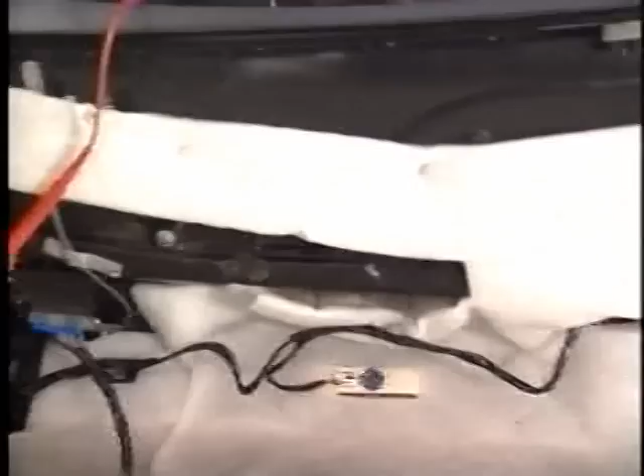Moving along to shorts, keep in mind that there are 2 types of shorts: short to ground and short to power. A short to ground occurs when a live circuit grounds out before its intended point. This usually results in blown fuses. A short to power occurs when the insulation chafes away on 2 live wires positioned next to one another, and the conductors contact each other. This crossfeed can cause a component to operate when a completely unrelated switch is used, or will prevent a component from being turned off.

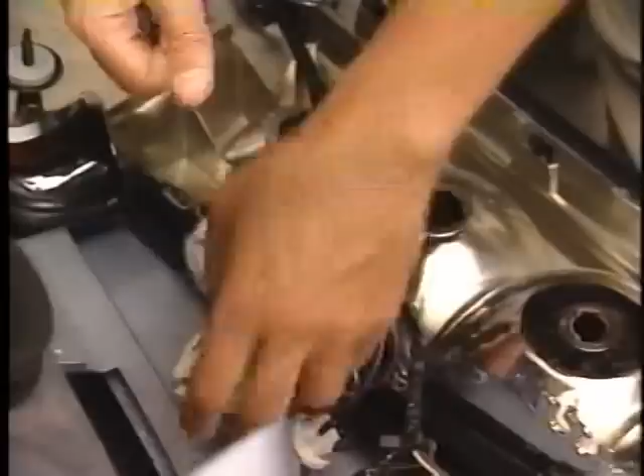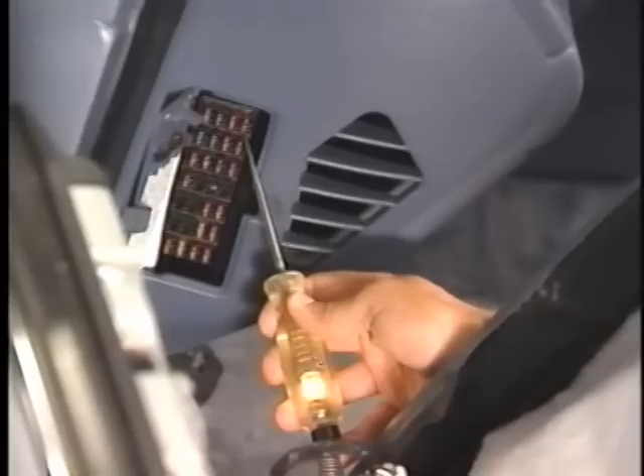The DC setting on the fluke meter can help you locate the short to ground. Begin by disconnecting all the loads in the problem circuit. Use the wiring diagram in the shop manual if you're not sure where they are. After turning the circuit on and making sure battery voltage exists at the fuse cavity, remove the blown fuse and connect the meter test leads to the fuse terminals. Wiggle the suspect area of the harness while watching the meter. When the meter reading changes, the portion of the circuit that was being wiggled is the one that's shorted.

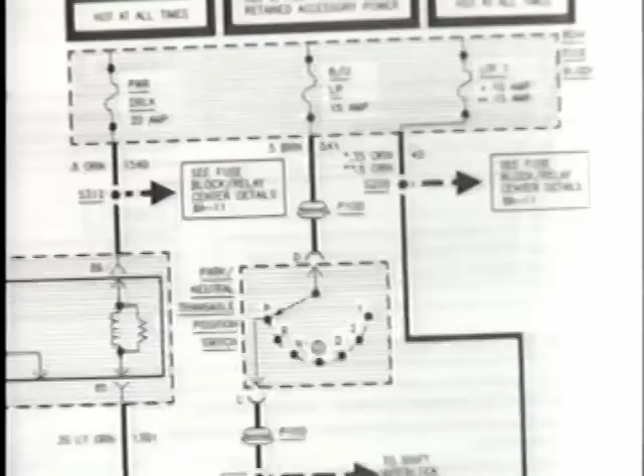Multiple branch circuits, like the tail lamps, interior lights, or power door locks, can be difficult to diagnose because any branch on the circuit can short to ground and cause the circuit fuse to blow. To locate a problem in this type of circuit, review the wiring schematic in the service manual. Using the Riviera's power door lock circuit with a blown fuse as an example, find the first splice after the fuse. In this case, it's splice 312. For more information, see the Fuse Block Relay Center details in Section 8A.

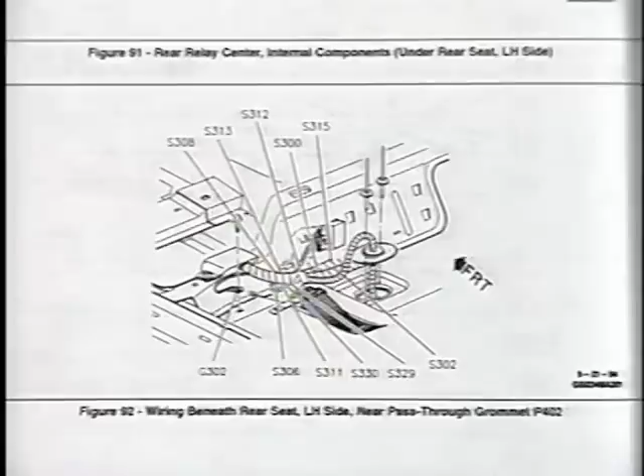The left-hand door isolation relay, door lock relay, left-hand seatbelt release, and right-hand seatbelt release are tied in to splice 312. To physically locate the splice, refer back to the power door lock schematic in Section 8A-131. Then, flip to the appropriate page. Splice 312 is located beneath the rear seat on the left-hand side. To isolate the problem, cut the circuit splice closest to the fuse panel. Then wire a spade-type fused jumper harness into each branch of the circuit following the splicing procedures outlined in Section 8A of the service manual.

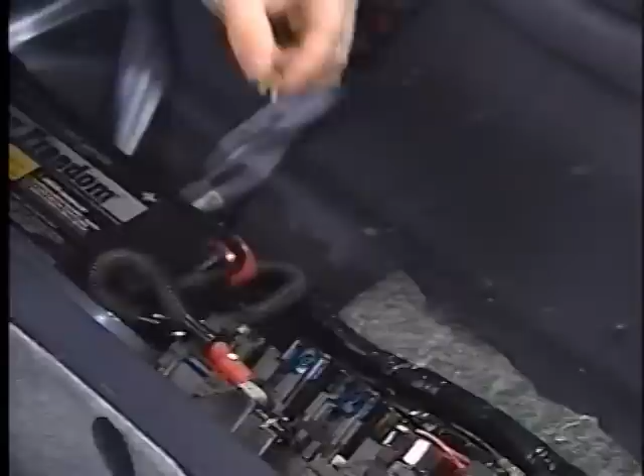The jumper wires should be at least the same size as the wire being spliced to prevent them from becoming fuses. When the jumpers are wired into the circuit, install fuses one size smaller than the fuse that protects the circuit, and install an original size fuse in good condition into the fuse panel. Then operate the circuit. The circuit branch that blows the inline fuse is the one that's shorting to ground. If none of the inline fuses blow, the circuit between the fuse panel and the splice is grounded.

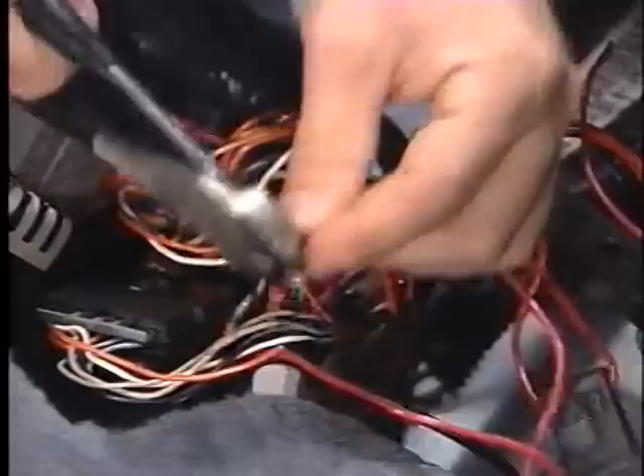In some cases, it may be necessary to reassemble the vehicle and drive it with the inline fuses in place to duplicate the problem. This procedure is effective in locating shorts to ground that occur on an intermittent basis. After locating and repairing the short, remove the jumper harnesses from each of the branches and splice them back into the circuit as they were originally installed following approved procedures.

An unpowered test light can be used to find a short to power. Begin by turning on the power for the problem circuit. The next step is to probe the circuit, starting at the ground side while working toward the load side. In this particular case, the brake lights are on when the parking lamps are on without anyone touching the brake pedal. This means the parking lamp circuit is also feeding the brake lamp circuit.

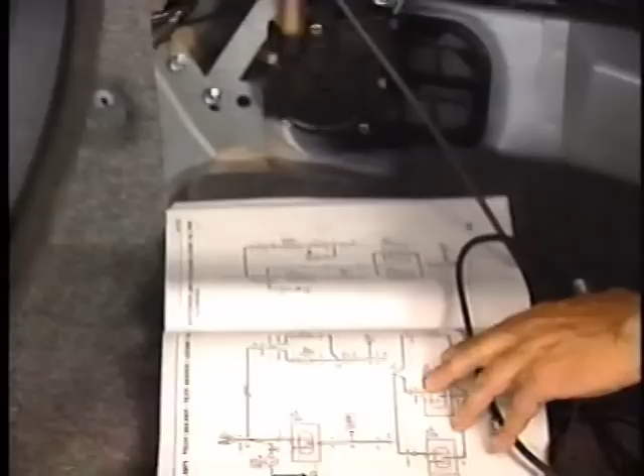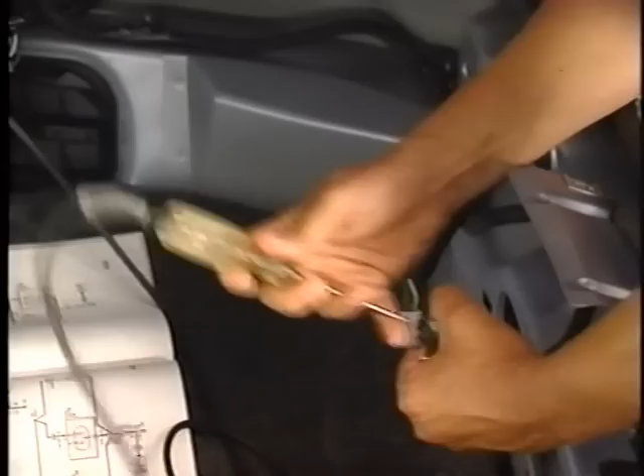After connecting the test light to a known good ground and checking the wiring schematic, you find power at both the parking lamp and brake lamp feed wire on the load side of the connector. To locate the problem area of the harness, separate the connectors and check for voltage again. Since only the parking lamp feed wire lights the test light, that section of the harness is working as it should. The problem lies in the other section of the harness. To isolate the problem, assemble the connector, then connect the test light to the brake feed wire and wiggle the harness.

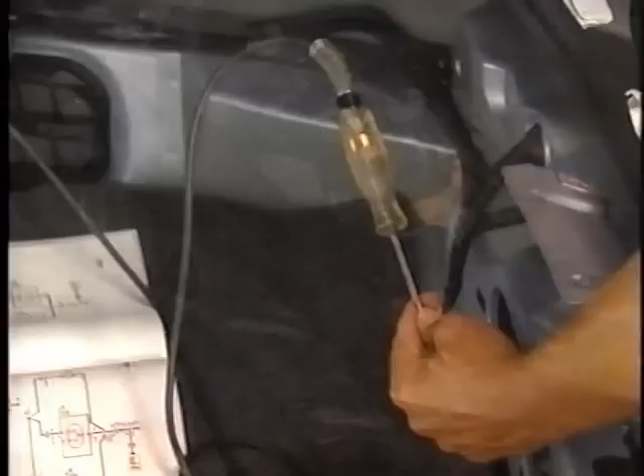When the light goes out, you found the short to power. Now, one way to check resistance in a circuit is to perform a voltage drop test. A voltage drop test indicates how much voltage is used by a particular connection, component, or section of a circuit. Voltage drop is directly related to resistance. The larger the voltage drop, the greater the resistance in a circuit.

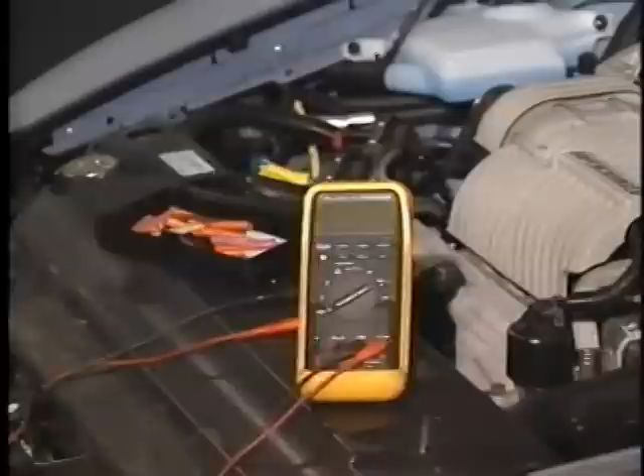To check for voltage drop in an ECM/PCM ground circuit, run the engine. If the engine won't start, make sure the battery is in good condition and the ignition is on. Set the Fluke meter to the DC volt scale. Then, connect the black test lead to the battery negative terminal and use the red test lead along with an adapter to back probe the ground side of the throttle position sensor.

With current running through the circuit, the voltage drop should be less than 100 millivolts. If it's more than this, check the ECM or PCM grounding point for looseness and corrosion. If the grounding point is okay, the ground wire may be partially or completely broken. Check for this by wiggling it. If the voltage reading drops, the wire is damaged and requires repair.

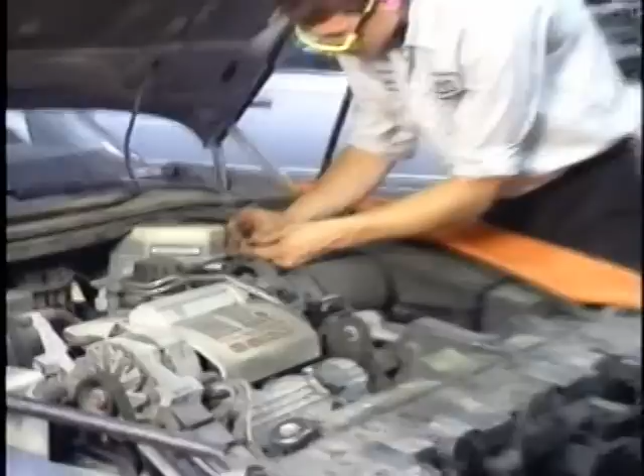Now, I know some of you may be skeptical about following the steps in the chart in order, and admittedly, in some cases, it may take longer to diagnose a problem following this chart. But the majority of the time, following the steps will save you time and reduce comebacks. The most important thing a service consultant can do is verify the concern. Begin by questioning the customer to see what the problem is, how often it occurs, and under what conditions. To help you get all the information you need for diagnosis, a diagnostic worksheet is included in both the service consultant's and technician's reference books.

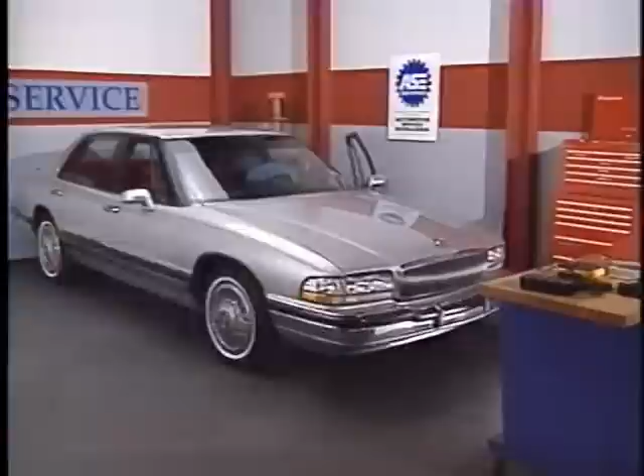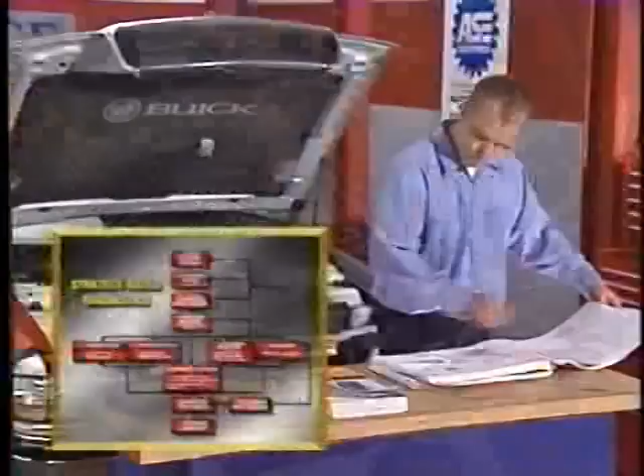Your time is valuable, so we'll explain strategy-based diagnosis using 3 real-world situations. In this first case, a customer's Park Avenue will not start, so begin by verifying the concern. Since the car won't start, perform the preliminary checks. Preliminary checks are a basic once-over to help you spot any obvious defects and identify what parts of the system are operating properly. In this case, make sure the battery cables aren't corroded and that they're securely connected to both the battery and starter solenoid. Also, take a look at the battery eye to ensure the battery is fully charged. Since these items are okay, move on to the diagnostic system checks.

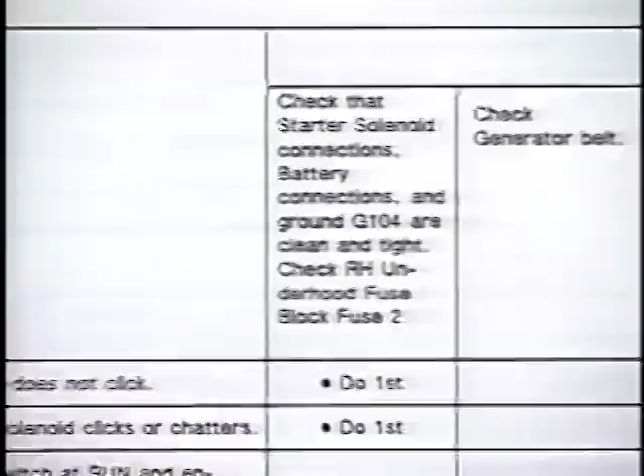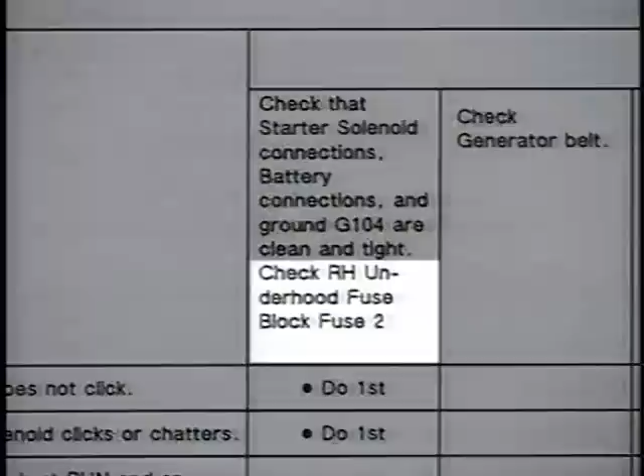After finding the problem, which in this case is engine does not crank and starter solenoid does not click, perform the steps in order. The first step is to check that the starter solenoid connections, battery connections, and ground G104 are clean and tight. Since you've already checked the starter and battery connections, check ground G104. It seems to be in good shape. Next, check fuse 2 in the right-hand underhood fuse block. And the fuse is blown. Only a short to ground would cause this type of problem. So check all the wiring in the circuit for signs of chafing or pinching.

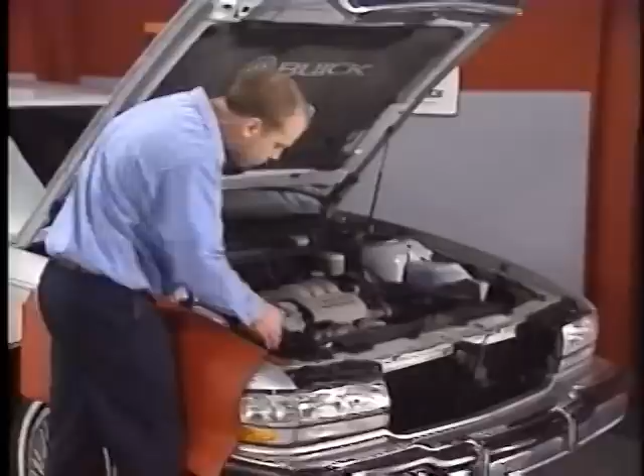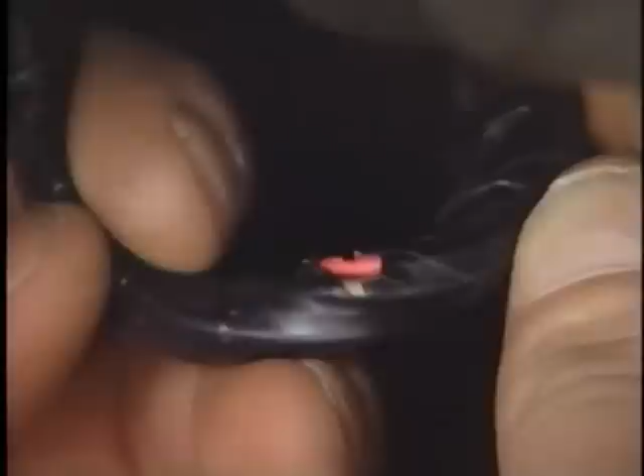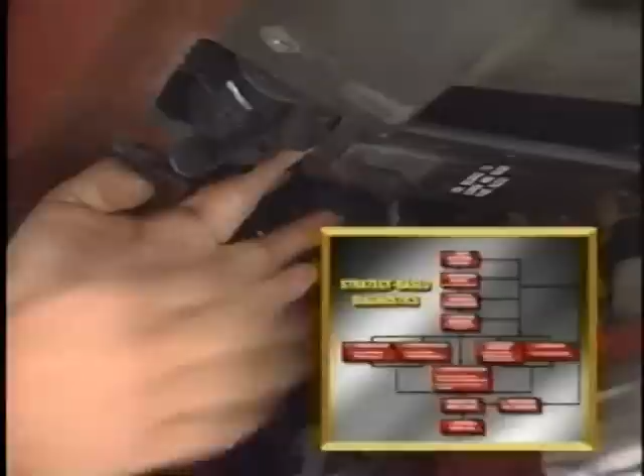If the wiring is resting against a sharp object, like the edge of a body panel, chances are the short will be there. If you're not familiar with the harness routing of the system in question, or just need to refresh your memory, review the wiring schematics in the service manual and check the routing of the harnesses in the circuit. In this case, the pink ignition wire for this circuit is pinched behind the parking brake. On closer inspection, the edge of the parking brake cut through the insulation. Since the wire was shorted to ground, you know it was responsible for blowing the maxi fuse. After repairing the wire, tie it away from the parking brake. Then install a new maxi fuse and verify the repair.

That illustrates how to use strategy-based diagnostics to repair a simple problem. You didn't have to go through all of the steps, but you did need to follow the steps in order. Now, let's see how strategy-based diagnostics can help diagnose something a little different.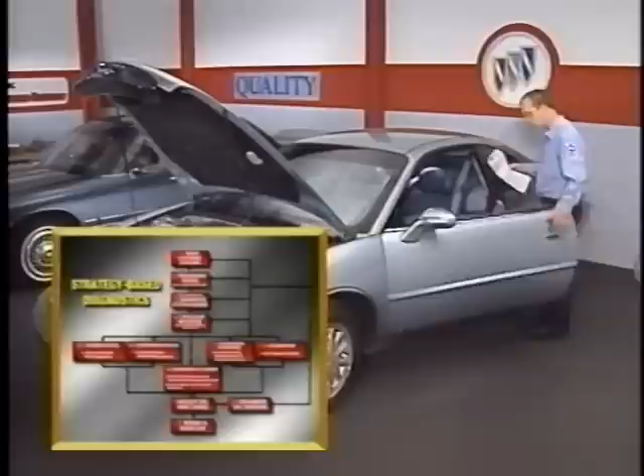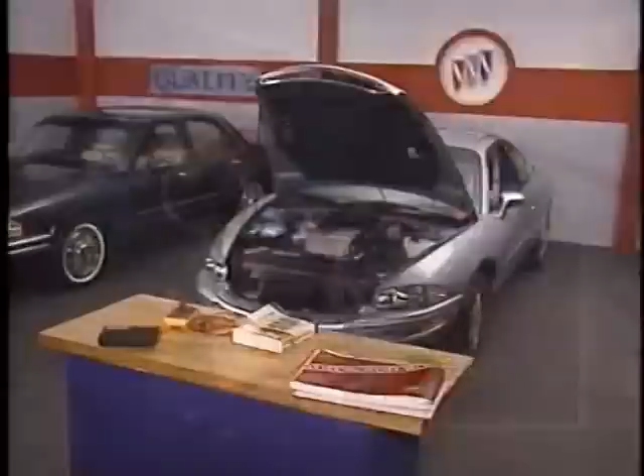The repair order for this Riviera states that the traction off indicator lamp is on steadily. As always, begin your diagnosis by verifying the concern. Sure enough, the lamp remains on after the bulb check. So perform the preliminary checks. This begins with a visual inspection, which in this case is outlined in the service manual.

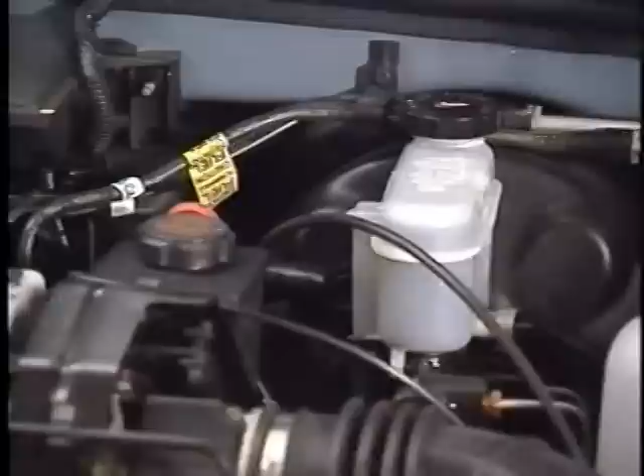The parking brake seems to be working okay. The major components seem to be in good shape. And all the fuses are in good condition. That leaves the connectors and grounds as the last items to check during the visual inspection.

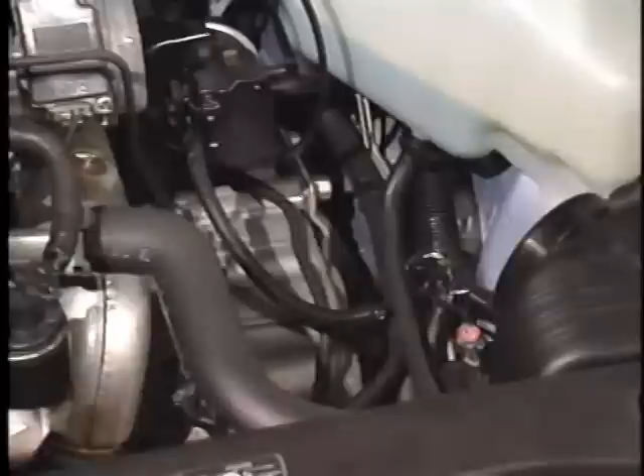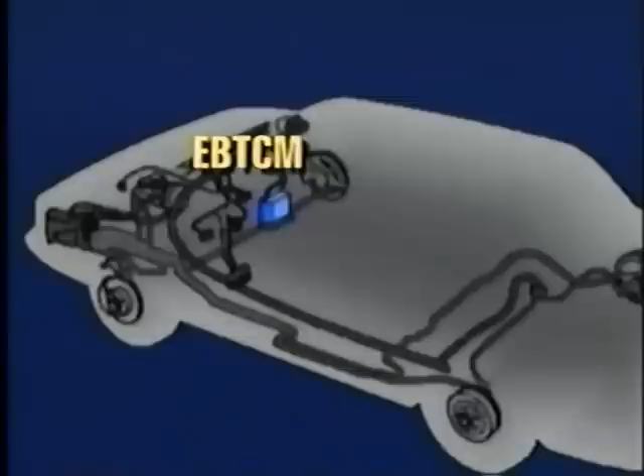Begin with the obvious anti-lock brake system grounds, which include G104, G201, G202, and G301. But don't forget the less obvious ground, G100. G100 is a PCM ground. However, with the Teves 4 traction control system, the electronic brake and traction control module communicates with the PCM on the data line to control engine torque when necessary.

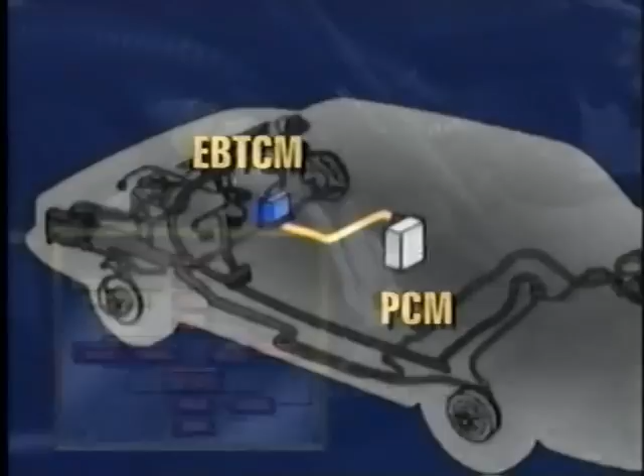In turn, a loose PCM ground could set codes 75 and 77, lighting the traction off indicator lamp. And ground circuit G100 is loose. After torquing the bolt to specifications, clear the codes and check for the problem once again. Since no codes are stored, you know you found the source of the problem.

Now, let's see how strategy-based diagnostics can help with something a little more complex. This LeSabre is in for service because the door locks work only when the doors are open. To add to the problem, the radio antenna and AC controls work on an intermittent basis. But instead of following strategy-based diagnostics, the technician decides to replace the door lock switch and solve the other two problems later.

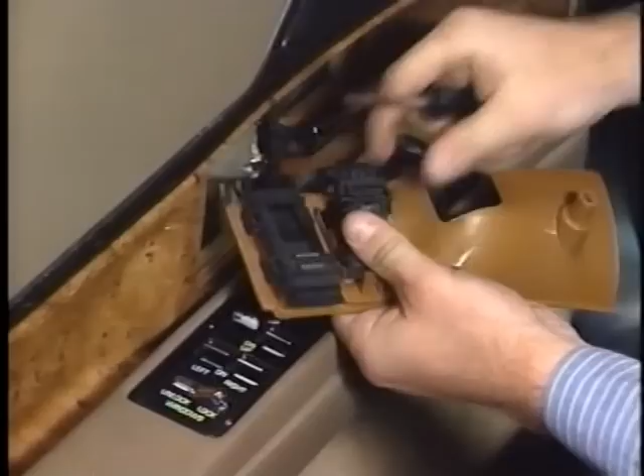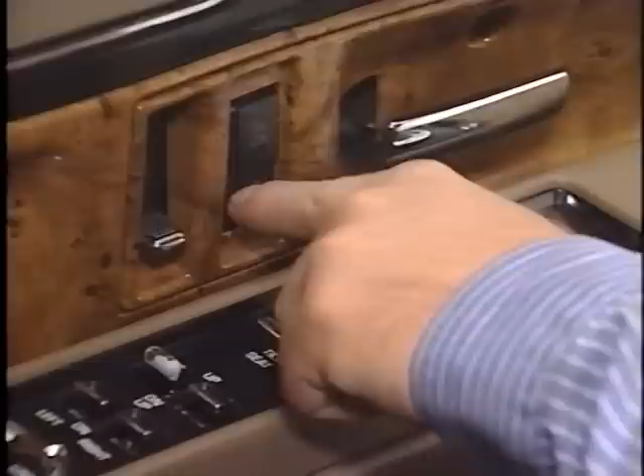So, he spends some time over at the parts window waiting for a switch. After 10 minutes have passed, he finds they don't have the switch in stock. Now he has to wait for the porter to go out and get a switch before he can complete the repair. With the right switch finally in his possession, he completes the switch replacement. But after all this, he finds it still only works when the door is open. So he's wasted a lot of time and hasn't fixed anything yet.

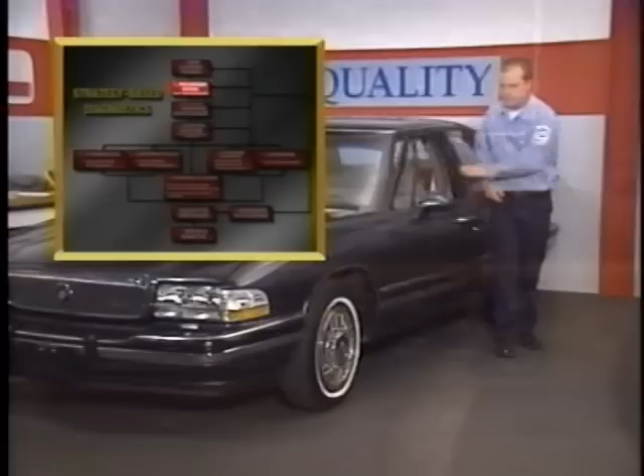At this point, he decides to get back on track by following strategy-based diagnostics. That begins with verifying the concern. All of these problems exist, so he moves on to the preliminary checks. Since he's already checked the operation of the systems in question, he needs to check them visually for any signs of problems. The wiring shouldn't be pinched at any point, and the insulation should be in good condition without any signs of cutting, chafing, or burning.

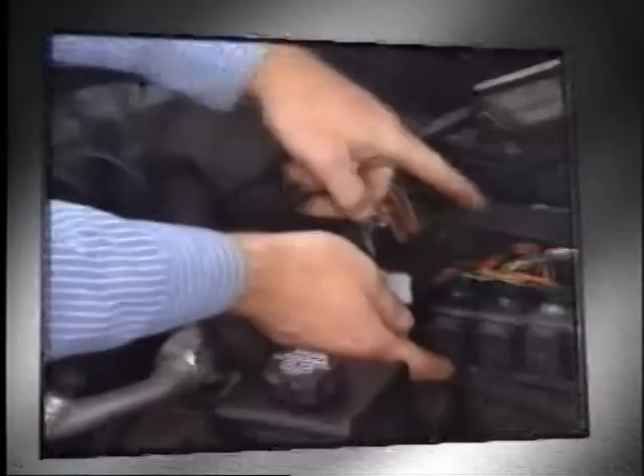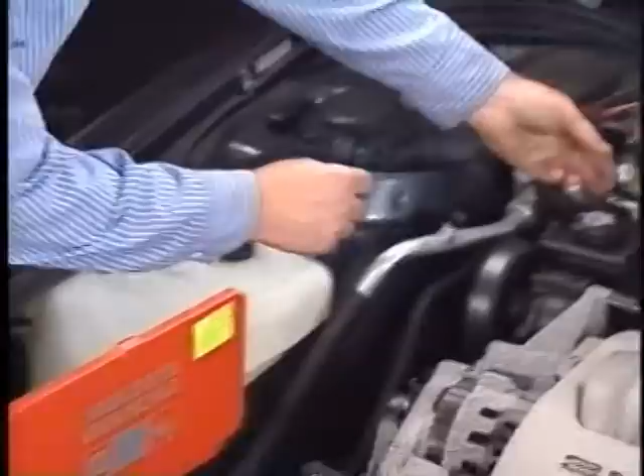As he works, he separates the electrical connectors in the circuits in question and takes a close look at their terminals. They're as they should be, fully engaged in the connectors and free of corrosion. He also checks the fit of mating terminals because he knows that they need to fit together snugly to do their job. To do this, he uses terminals of the opposite sex to prevent terminal distortion. Although larger terminals can sometimes be bent back into position, any poor-fitting micro-terminals should be replaced. In this case, the preliminary checks didn't reveal anything unusual.

So he moves on to diagnostic system checks. Since this problem ties into 3 different systems, he'll need to follow the diagnostic system check for all 3. Keep in mind that earlier manuals might refer to a system check or a functional check rather than a diagnostic system check, but they're all the same thing. Unfortunately, the diagnostic system check didn't reveal the source of the problem. So he checks for bulletins. Remember, this includes information available via TechLine equipment, as well as printed bulletins. But no information covers this particular problem.

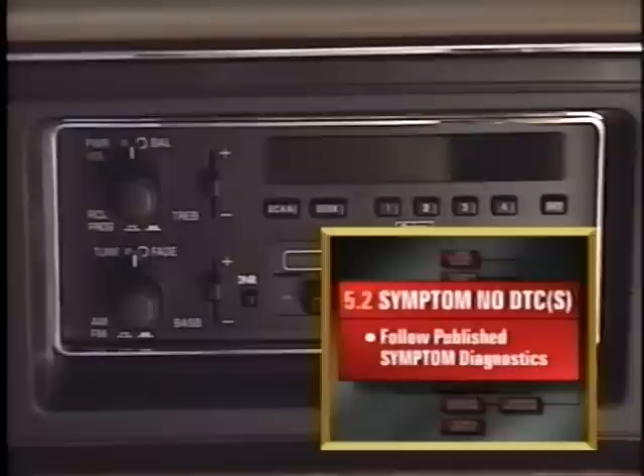Normally, he would proceed down to step 5.1 and check for any stored DTCs. However, the C67 air conditioning in this LeSabre doesn't store DTCs, and the power door locks and antenna never have. So he moves to step 5.2 in the chart, symptoms with no DTCs. However, with a problem like this one, he knows the chances are slim that a symptomatic chart will cover all 3 situations simultaneously. And that moves him to step 5.3, no published diagnostics.

Since there are no published diagnostics, he'll need to analyze the problem and develop his own diagnostics based on his knowledge of the circuit, as well as from other available sources of information, like the wiring schematics in the service manual and any related KnowHow programs. In order to have a problem in so many different areas, there must be a common thread that these circuits share, and this leads him to check the power and ground circuits. Since all the systems that are experiencing trouble don't share power circuits, the power circuits can't be the problem.

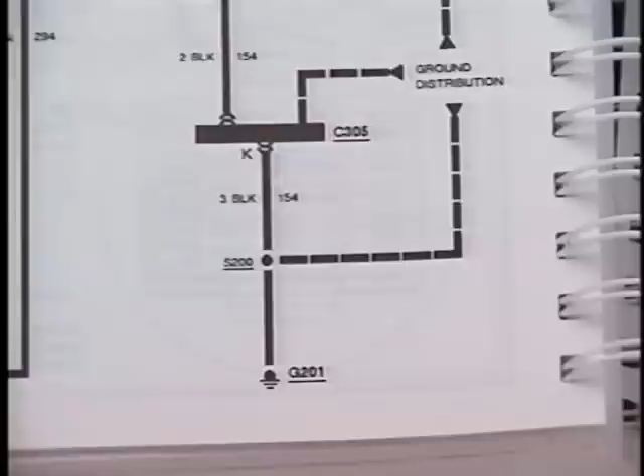However, the wiring diagrams indicate the power door locks, radio, and AC control head all share the same ground circuit. In this case, it's circuit G201. And circuit G201 is loose. This very well could have caused the problem the customer experienced. After torquing it to specifications, he verifies the repair. All the components seem to be working normally now.

In a situation like this, the technician didn't need to go through every step in numerical sequence. For example, he knew that a symptomatic chart wouldn't cover a situation as unusual as this, so he jumped from step 4 to 5.3. And that's the beauty of strategy-based diagnostics.

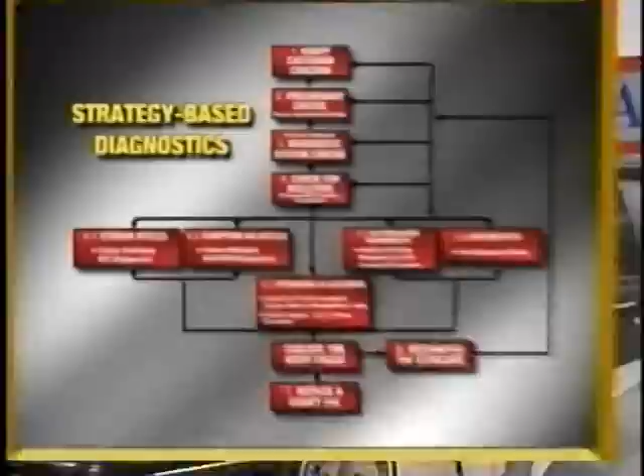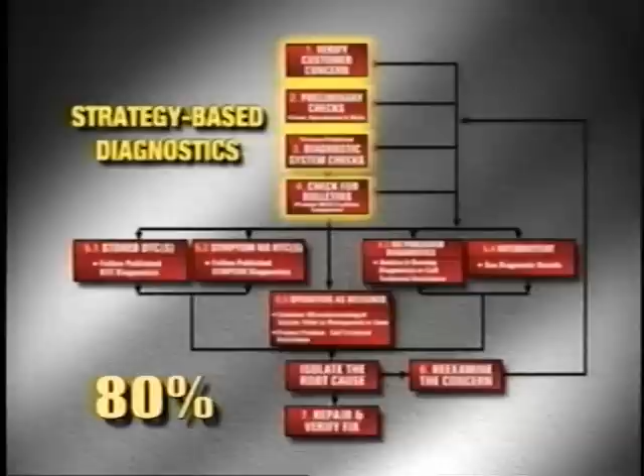As your experience grows, you may not have to perform every step in the chart in numerical sequence. It all depends on the problem at hand. And the chances that you'll need to go through all of the steps every time are pretty slim. About 40% of all problems are diagnosed by the time you reach the end of step 3. And your chances of finding the problem increase to about 80% when you've completed steps 4, 5.1, and 5.2.

Over the long haul, following strategy-based diagnostics will increase your diagnostic skills, which in turn can help put more money in your pocket.

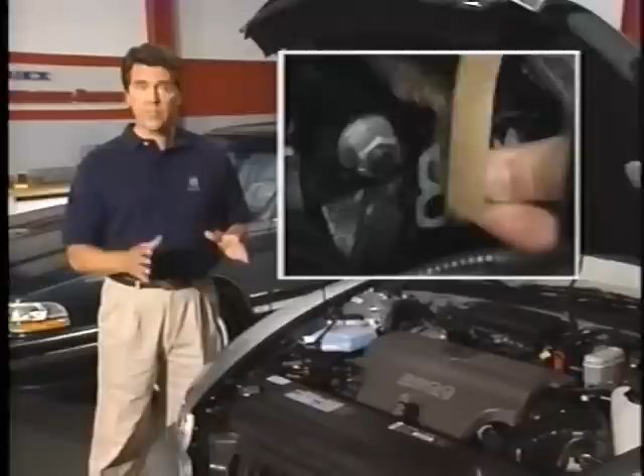As you can see from our previous examples, grounds are vital to the operation of the electrical system. And systems whose operation is based on milliamp signals, like the ECM, PCM, SIR, and ABS systems, are extra sensitive to their ground circuits and connections. What would seem to be a minor amount of resistance in a ground circuit, caused by things such as corrosion and paint, can have a detrimental effect on these circuits. In effect, it's like having a resistor in the circuit.

Consider this. The level of voltage and amperage flow in a particular circuit helps determine the factory calibration of electronic sensors. In turn, the resistance in a ground circuit has a direct bearing on the level of voltage that's available for that circuit. If the resistance in the ground circuit rises above a predetermined level, it lowers the voltage to the sensors in the circuit. In effect, this changes the calibration of the sensors, and everything goes out the window.

A ground circuit problem can usually be identified by strange, seemingly unrelated problems like flashing lights along with intermittent operation of various systems and components. Two different tests can check for this problem. The CAM's ground integrity test will tell if the ground is good or not. Or use a DVOM to perform a voltage drop test.

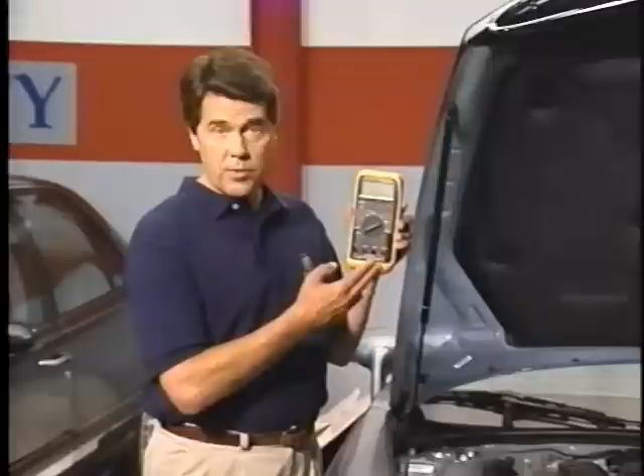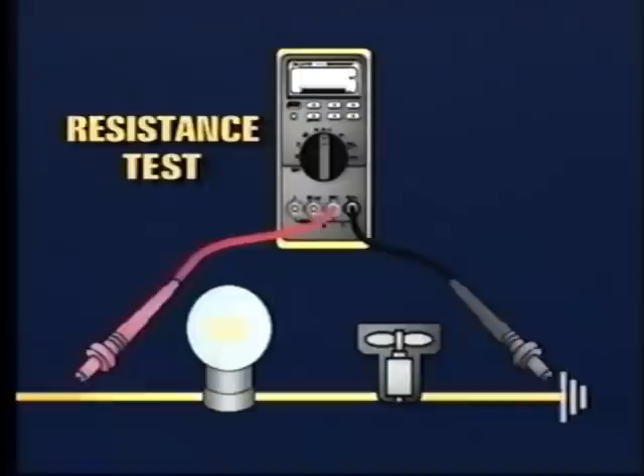Now I know what you're thinking. If you want to check resistance, why not use the ohm meter function of the DVOM? Well, an ohm meter provides very little current during a resistance test, far less than when the circuit is actually operating, and this can lead to inaccurate results. However, a voltage drop test checks the ground circuit with its normal current load, and that will show the exact voltage that's taken up by resistance at a ground connection.

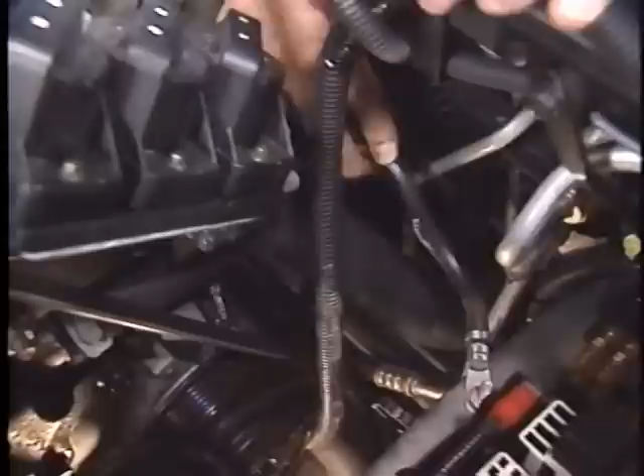Ground G100 is especially critical because it provides a ground path for all components that use an ECM, PCM, or EBTCM ground path. A ground that offers too much resistance will reduce circuit voltage, power that's needed to operate components and allow accurate sensor values. Also, keep in mind that you can't test a ground for looseness by trying to wiggle it with your hand, unless it's really loose. If you suspect a loose ground, tighten it with a torque wrench.

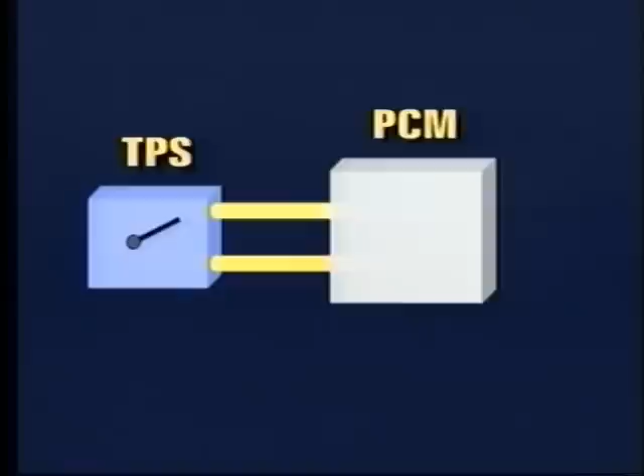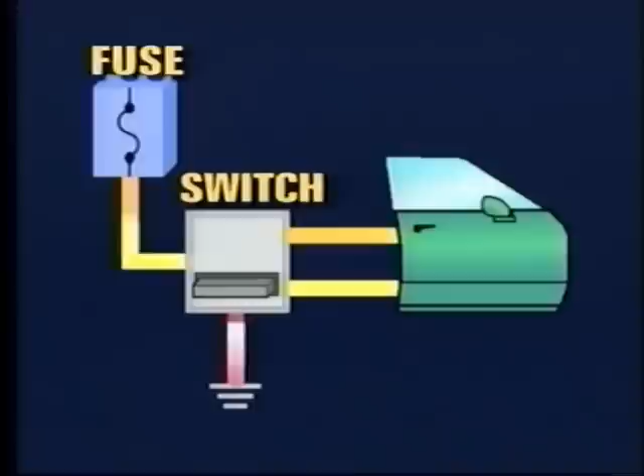Now I'd like to talk to you about one other item: clean and dirty grounds. A clean ground is one that has only minor changes in the current that flows through it. A clean ground is essential for proper operation of electronic components that operate on low current, like the ECM, PCM, and ABS system. A dirty ground is used for relatively high-powered components like power windows, power door locks, and headlamps.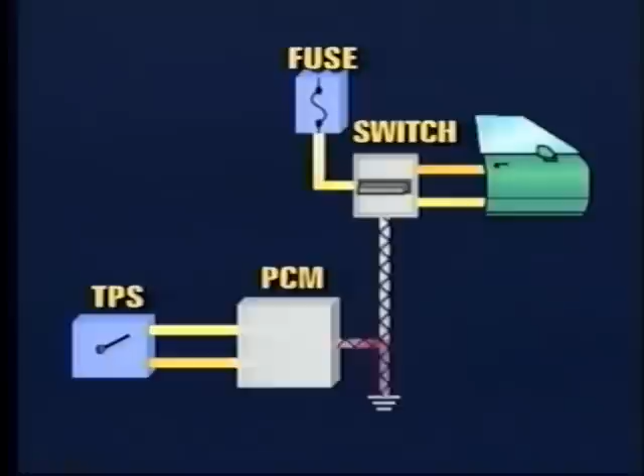Since these components use more current than electronic components, they have a greater swing in the current flow through their ground circuits. Problems arise when the ground from a high amperage circuit is spliced into a low amperage circuit. The fluctuations in the current flowing through the high amperage ground circuit cause the current flowing through the low amperage ground circuit to change. And changes in current flow through the ground circuit can cause sensor voltage values to change dramatically. This can cause all sorts of bizarre problems, ranging from poor drivability to intermittent air conditioning operation.

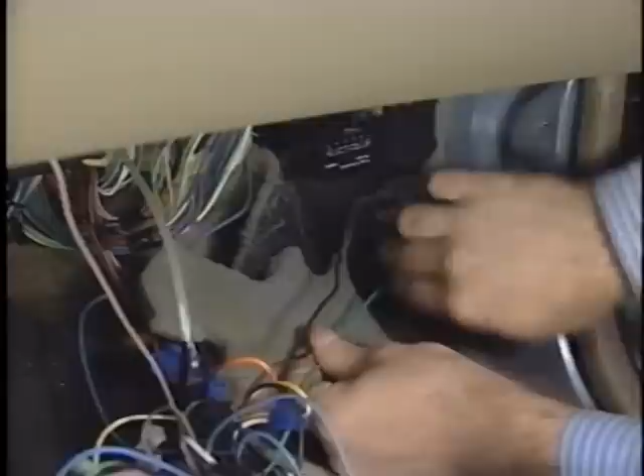When do these grounding problems usually occur? After improper installation of aftermarket components, such as keyless entry systems, cellular phones, CD players, and alarm systems. So, if an unusual problem occurs with an electronic system immediately after an aftermarket component was installed, see how the component is grounded. Chances are it's the cause of the problem.

Now, before we finish, let's pay a visit to Buick's Technical Assistance Center. Buick Technical Assistance, this is Larry Schramm. Where strategy-based diagnostics are used every day.

The extraordinary is common. Lightning struck the car through the antenna. And DCS bulletin searches are a way of life. What I'm going to do today is run you through the DCS bulletin search and how to log into the system, and we'll do a brief search.